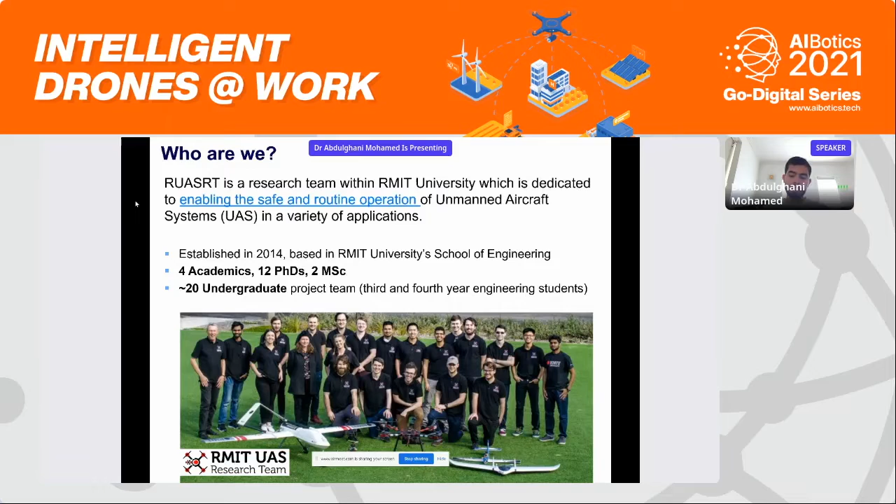So I'm part of a research team at RMIT University, and we are dedicated to trying to identify technologies and undertake research that enables safe and routine operation of drones or unmanned aircraft systems for a number of applications. So we are about 4 academics, 12 PhD students, 2 masters, and an increasing number of undergraduate students working in this area. And we have worked with various industry partners trying to enable this technology.

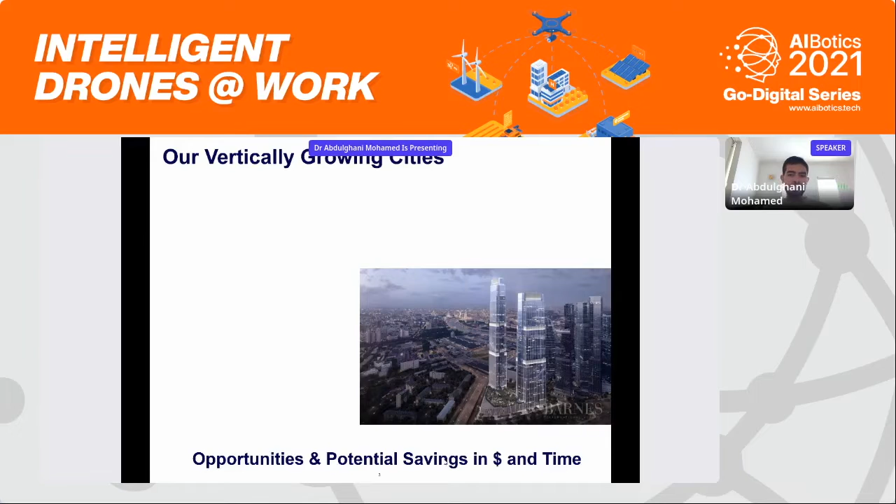So starting off basically with our growing cities. They are growing, not horizontally, but vertically. And that presents an opportunity in terms of savings in both time and money. So thinking about, for example, the person living at the penthouse at the top there, there is an opportunity to potentially grab an air taxi, which is a concept that's being pushed at the moment and is of very high interest to a number of companies, to go, for example, to the airport.

And instead of going through normal streets, which would take time and through congestion of traffic. There is also the opportunity of getting your food delivered to your penthouse at the top of that building instead of taking the elevator, which takes a few minutes and so forth. So there is that growing market as part of something called urban air mobility. Now, this presents opportunities and also presents challenges.

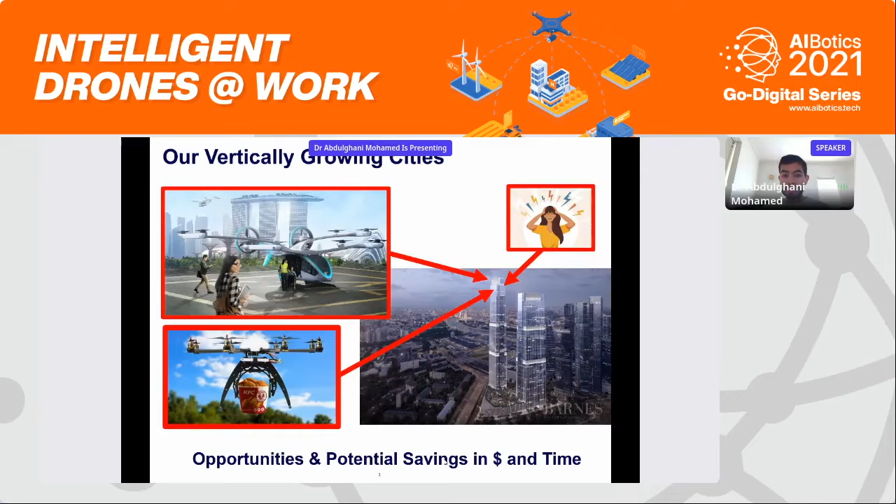One of them being that the neighbor next door in that penthouse or the level beneath you is probably not going to enjoy the noise of a drone or an air taxi operating, and that noise is quite a big issue for adopting that technology. It has been a problem even for standard aircraft and residential houses around airports. Now drones are routinely operating in urban environments. For example, here in Australia, we've got Canberra as one of the leading cities that has a drone delivery service operational, and there is a very large and increasing number of complaints from residents about noise.

So some of the major challenges include turbulence. You've got this structure that's basically obstructing the flow, and what that induces into the flow field is mechanical mixing. That can be quite challenging and has led to accidents before. So there is that component. There's also the problem of energy density.

Our batteries still aren't at the stage of, for example, animal fat in terms of the energy they can store, which means that these aircraft have a relatively shorter range than we would like. So your network or your operational fleet cannot go very far, depending on the configuration and so forth. And lastly, the noise problem that we talked about. So we actually work across those 3 areas, in addition to other areas as well.

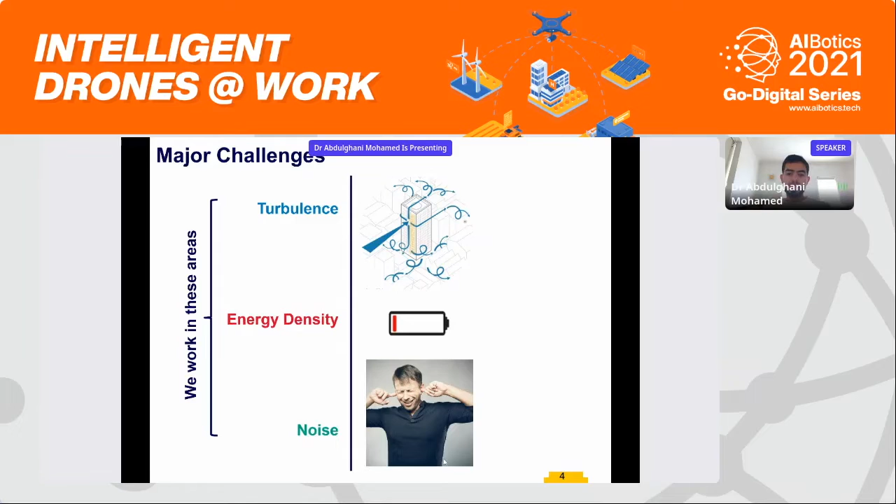We've also done some research with respect to different control architectures. We've also found that the biggest problem with such control systems or autopilots for drones flying in highly turbulent environments is that the actuation has the biggest time lag. So from the time you sense a disturbance to the time you compute it, there's not much time lag, but most of the time lag is sending that command to actuate and correct for maneuvers by the drone.

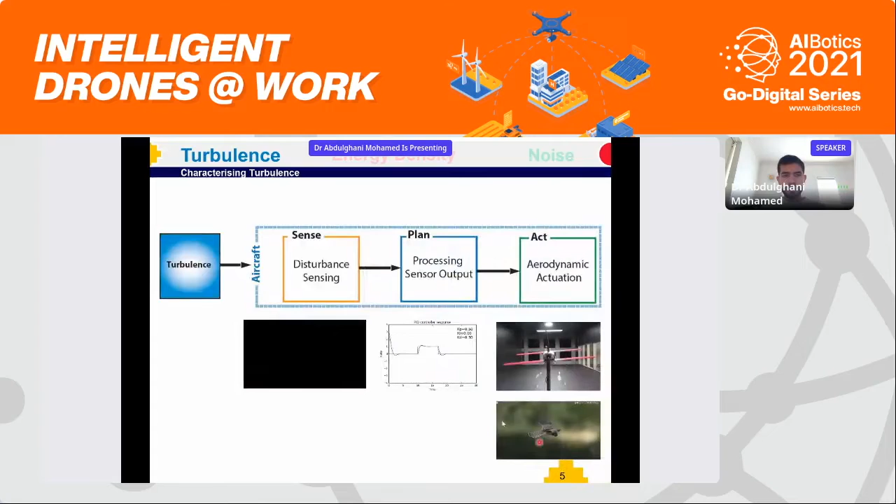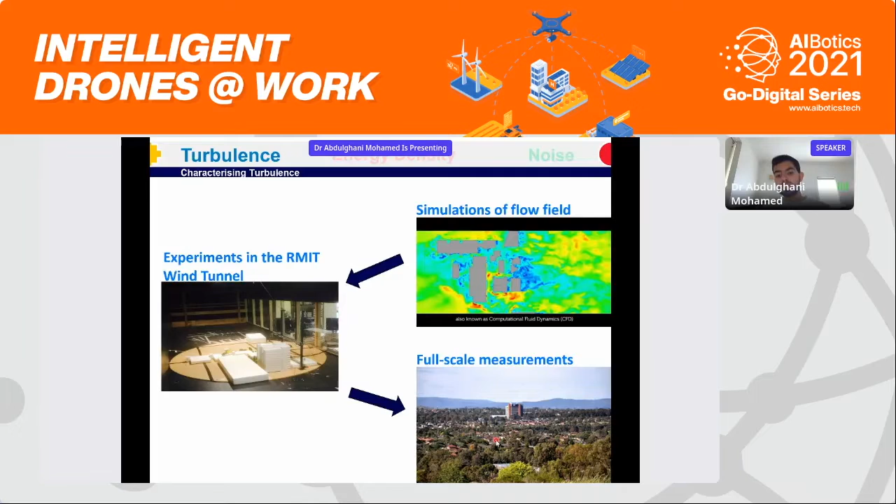We've done some experiments to validate the simulations, but we've also done some full-scale measurements to understand the flow field. That's part of identifying worst-case gusts, the worst condition an aircraft flying through that urban environment or around that building infrastructure can face. With the concept of air taxis, for example, you are going to be flying very close to the rooftops of buildings. So we expect that flying through shear layers represents one of the worst types of gusts an aircraft can go through, because of the high magnitude of the fluid velocity and also the angles of that flow field.

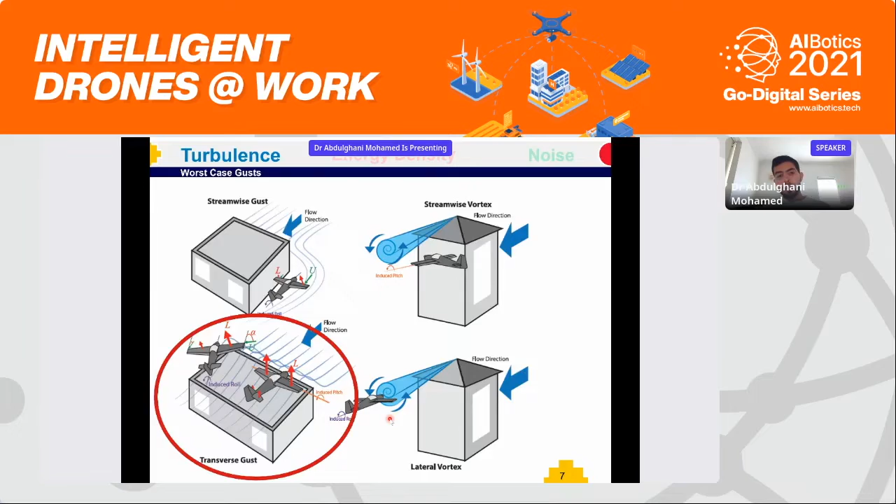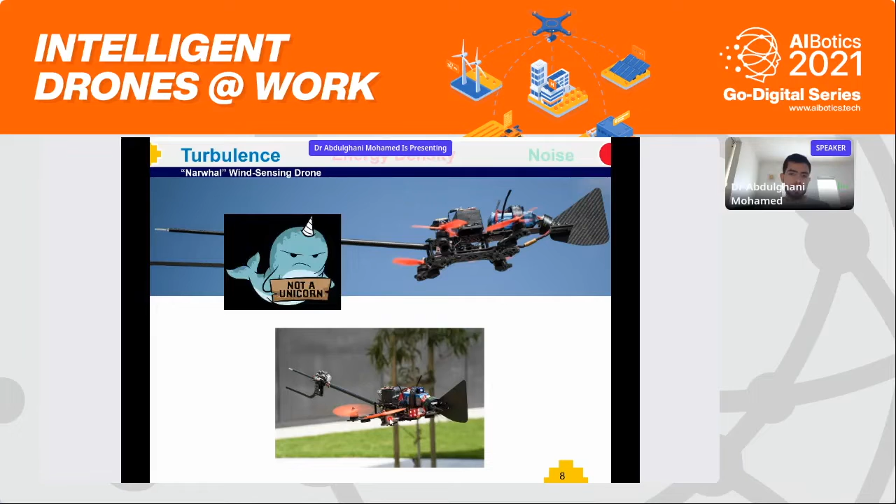So we've developed a drone that we called Narwhal, for obvious reasons. Basically this drone is capable of measuring to a high degree of accuracy the flow field in an urban environment. So it's almost like an airborne wind sensor. This was quite a success. We prefer not to call it a unicorn, but this was quite a success. And what we've done was, I'll click, you can see a video here.

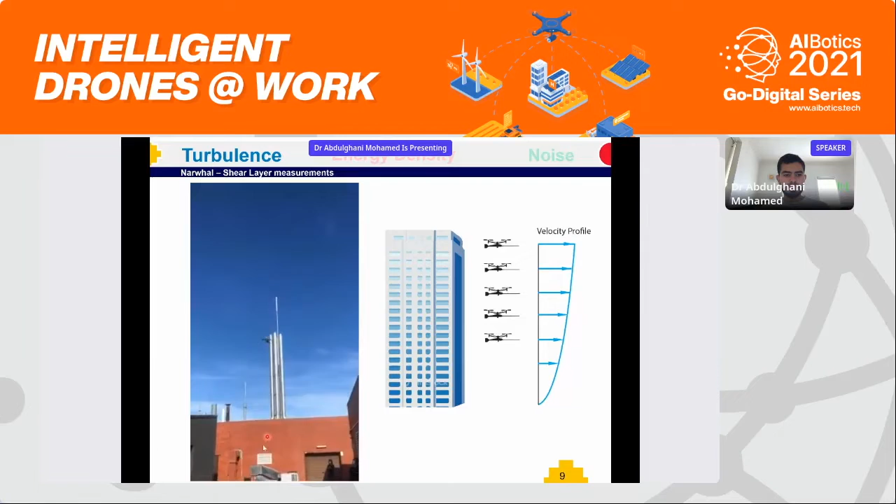So this video shows the drone actually flying on top of that building and basically taking measurements at full scale on the top of that building through the shear layer, and we're using those measurements to try and understand what an aircraft would experience as it flies on top of that rooftop.

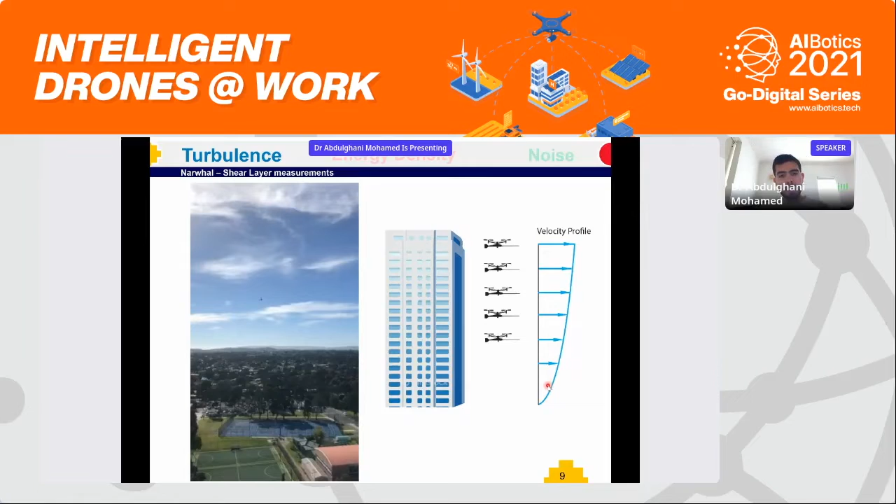Now, we're also working towards expanding that concept by flying a number of drones to try and basically get an instantaneous, real-time velocity profile in front of that building, which is useful for a number of applications, including architectural applications. In fact, we are working with an architectural firm and building that capability as part of that.

So moving on from that concept and utilizing that sensing within a control architecture to help not just characterize the flow field, but help reduce the effects of turbulence on the aircraft itself. What we've done was we've installed those sensors on the leading edge of an aircraft to try and see, when we use that as a part of the inner control loop, does it improve things? And the answer is yes, it does.

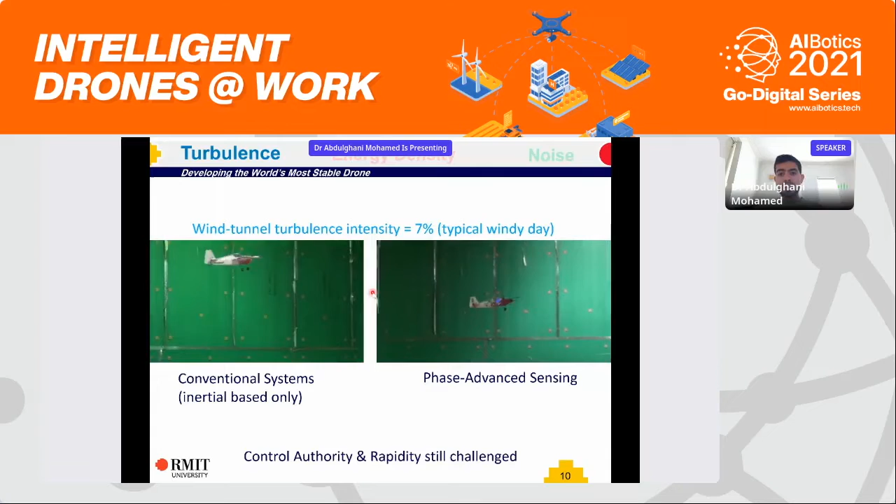So one of the things we found was if you keep increasing the turbulence intensity, it gets to a point that even with advanced sensing systems, as you see on the right there, it starts to become quite challenging from the perspective of control authority and rapidity. So the aircraft doesn't have sufficient control authority to counter the large gusts or intensity of gusts. And we've seen instances where the aircraft was fully deflecting in one direction, but it was just being overpowered.

So the crazy idea was for us to try and study that and replicate that in our wind tunnel facility. So what we're trying to do is achieve bio-inspired designs that would enable us to mitigate the turbulence in a much more effective way, because aircraft have sort of evolved in a way that would enable them to carry human passengers on board and human pilots. But as we deviate away from that, I think we should start revisiting the shape, and especially with smaller aircraft that don't have that much structural loads, we can start to explore novel shapes and design methodologies.

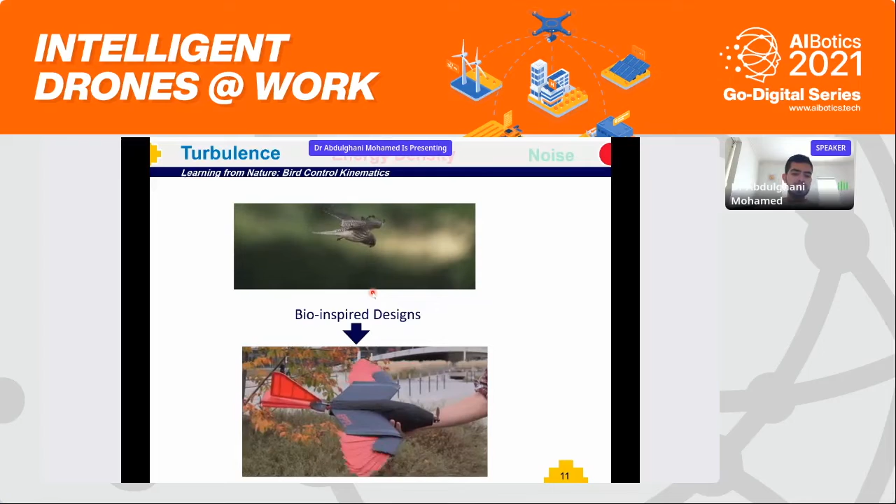So we haven't been involved in this UAV that you can see here, this red bird-like UAV, but this just shows how we would want to achieve that. And the right place to start is by studying birds. So a crazy idea of mine a couple of years ago was to actually get birds to fly in our wind tunnel facility, train them up, get them to do the same behavior, which, trust me, isn't easy. I guess I learned my lesson working with animals, and it's not easy because they're not mechanical systems. They've got a mind of their own, literally.

So training them to wind hover, as you can see here, and basically subjecting them to different turbulence conditions, different gusts, and characterizing their response using machine learning techniques to try and understand trends in their response. And you can see here the bird is actually flying in low turbulence conditions, and it's not doing a lot of correction maneuvers there. And you can see its head is fairly fixed at that point.

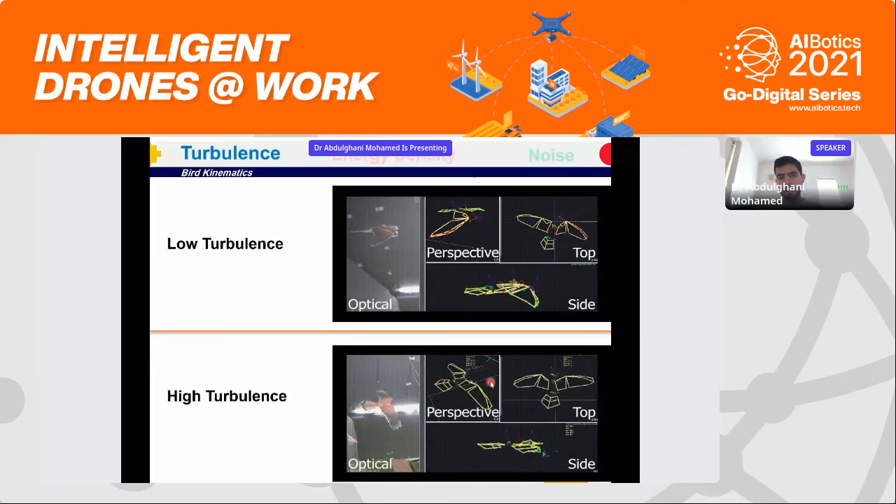As you increase the turbulence, remarkably, the head also stays almost fixated to that position to within millimeters, which was quite surprising for us. And it's doing a significant amount of corrections, and deciphering those kinematics and those articulations of the wings and the tail is really the goal, and using AI to try and understand what's going on so that we can transfer that knowledge to drones, essentially. And that is the goal, and that has a huge number of applications.

The other aspect, now moving on from turbulence, is energy density. By utilizing the simulations that I just talked about, around the urban flow field that I showed before, we can say, all right, well, there are regions for a given wind direction that you'd want to avoid because the turbulence is so high in that. And if you're planning to go from point A to point B, maybe best to avoid that location because it's just not wise to do so.

And manned passenger aircraft do that all the time with getting weather forecasts. So I think it's quite sensible for us to utilize such technologies and such methodology to try and enhance our path planning rather than just blindly go from point A to point B in a straight line. And what we've done was we've even taken that a step further by saying, well, you've got an obstacle. And what that obstacle does is it blocks the flow. So the flow tends to go up.

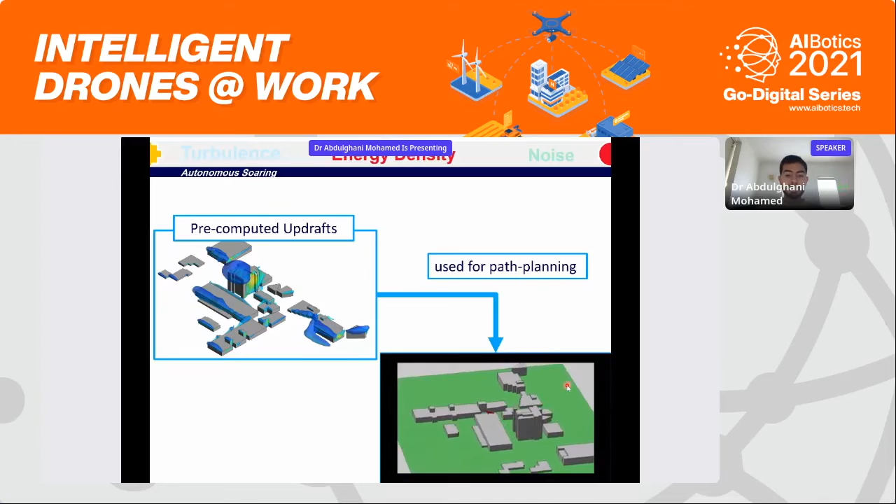And theoretically, through the simulations, which you see on the bottom right there, where you have a little glider that's going across our campus in simulation world, it is possible. In fact, that is an unpowered glider, and it can complete its mission entirely relying on the atmospheric wind and the updrafts. So we've utilized that approach by doing the world's first autonomous orographic soaring attempt by utilizing that glider. Again, it is unpowered. It does not have any propulsion.

It just has a battery on board that powers the electronics that basically tell the drone where to go. And in this specific video, the aircraft was instructed to just stay in this updraft region and gain as much height as possible. And you can see here that it's doing that quite well. So obviously you can't see the wind in the video, but there is quite a substantial wind, and it's in this region, sort of on the windward side of the building. So there is potential and opportunities to utilize and harvest energy from the flow field.

Lastly, the work we do in the noise area is to try and understand and characterize the acoustic field and the emission that's coming out of a drone. And what we found is that if you're close enough, then obviously you've got regions that might be louder than others. So if you're standing about 45 degrees away from a drone, you'll probably hear it loudest. But if you're in the same blade plane or in the same plane as the aircraft, then that will be the quietest. But obviously, as you start going away, you can start to treat it as a point source.

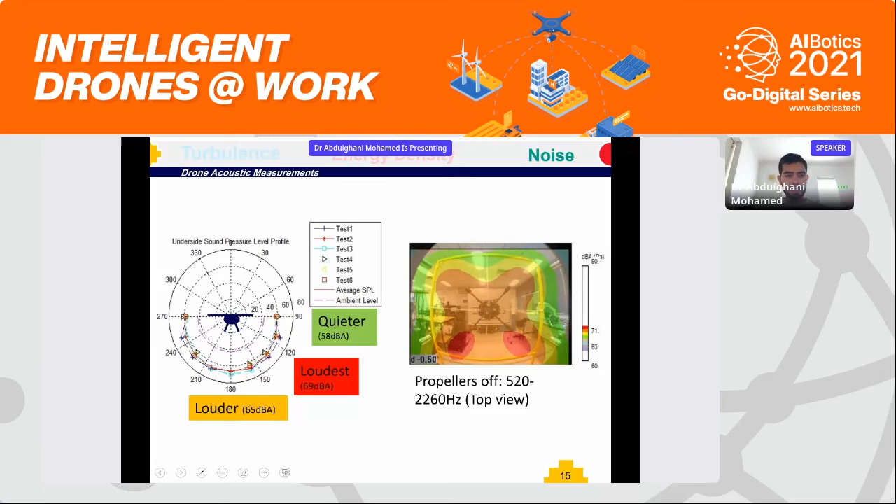So one of the things we've done along with an industry partner is we basically used machine learning techniques to vary propeller geometries, along with CFD simulations or flow simulations that we can use to predict the acoustic signature of those propellers, and use that in a feedback loop to identify the influence of different metrics on the acoustic signature of propellers, and come up with a couple of candidate propellers that we experimentally validate.

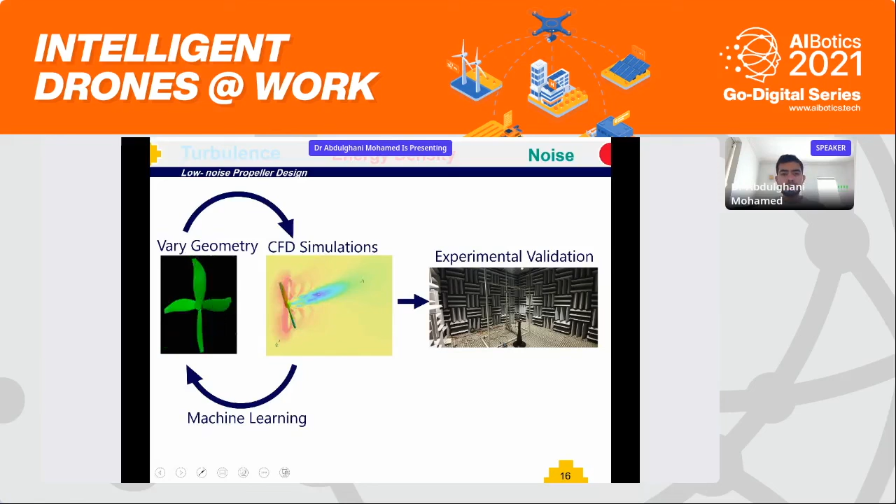And what we found was that we were able to reduce the noise of the propeller by about 17 decibels, which was quite a remarkable achievement, because we haven't even explored the full parameter space of propellers. So that was probably one of the more recent successes that we had, and was circulated in the media recently. But I guess that brings us to the end. So hopefully I've given you a bit of an overview of the different areas that we work in.

And if you're interested, you can search on YouTube for Eagle Kills Drone, which shows one of our highest watched videos, involving one of the experiments we did with that glider, trying to explore soaring and harvesting energy from the atmosphere. But the aircraft we were flying was attacked by a wedge-tailed eagle, as the experiment was done in Australia. And this is a 2-meter wingspan eagle that basically decided to grab our drone and fly away with it, and it had about $10,000 worth of equipment.

So I had to go to the other side of the mountain, and I'm pretty sure I saw snakes and other dangerous creatures. But luckily I retrieved it.